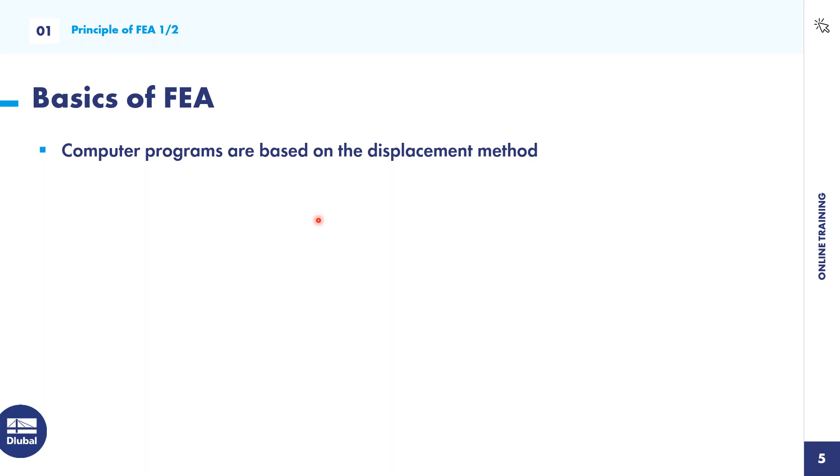But computer programs use the displacement method because it's easier to implement, more convenient, and easier calculation for the programs.

So if you look at any complex structures, it is normal that the analytical solution is not so easy. It's hardly possible to calculate or to find any analytical solution.

This is also the reason why real structures are decomposed into a mesh of finite interconnected elements. At each element continuum and at each node, the properties, especially the degrees of freedom like deformation or restraints, are described at the nodes - the properties of the element continuum.

Normally the finite element analysis is just a numerical approximation of an exact solution, so the mechanical behavior is described by approximation sets. The whole process of decomposition of a structure into finite elements is called discretization. Remember that, this is very important: discretization is the decomposition of structure into finite elements.

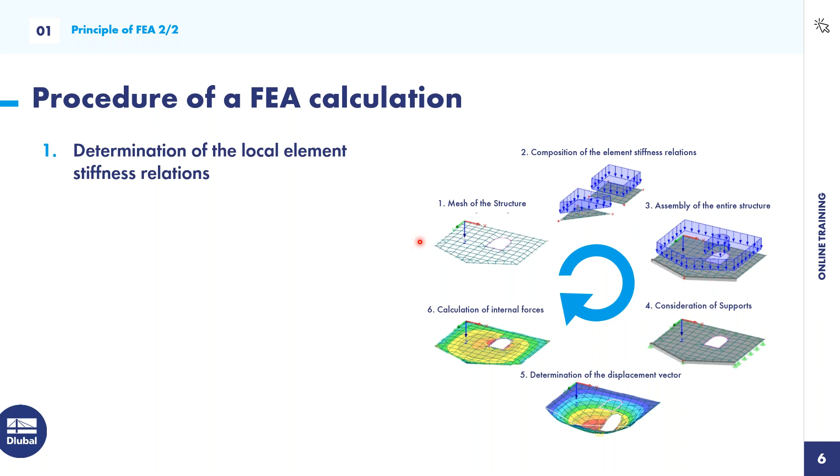So what is the general procedure of an FEA calculation? On the right side you can see this image with the basic steps. First of all, what we gonna do is the discretization, so we determine the local stiffness relations, the local element stiffness matrix at each node. So we mesh the structure, we do the discretization. Then we transform it to the global coordinate system and assembly the whole entire structure.

Then we also have to consider different supports in order that the structure is stable. So the boundary conditions are very important to define, and normally the boundary conditions are the support conditions.

And then, as we said before, the displacement method is the method implemented in computer programs. So first we determine the displacement vector, and after that the internal forces like bending moment, shear forces, normal forces, tensions, stresses, strains, and so on.

This is also called the solution of the equation system, and then we do the determination of support forces and internal forces. So this is the general and very short concept of FEA calculation.

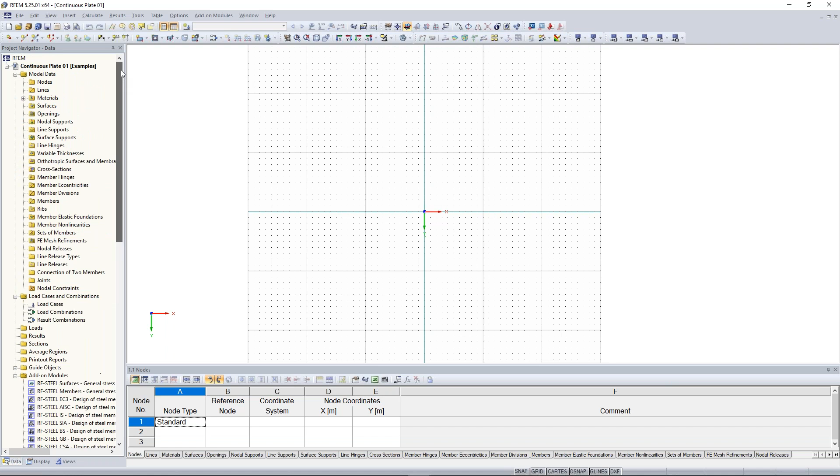Good. So I will explain now the whole user interface of RFEM. You don't have to do it now with me, because I will open another project where I can explain the whole user interface using an already existing project. Just watch and maybe note some information.

So I will open this one. Fine, very good. I will activate here in the status bar the snap and grid function.

Chronologically, the first step is that we have here the menu bar, and in the menu bar we have the possibility to do almost every kind of workflow function of RFEM. In the basic file menu, you can save, open, import, export, insert blocks, save in the project manager, print, and so on. I think this is known from other software applications.

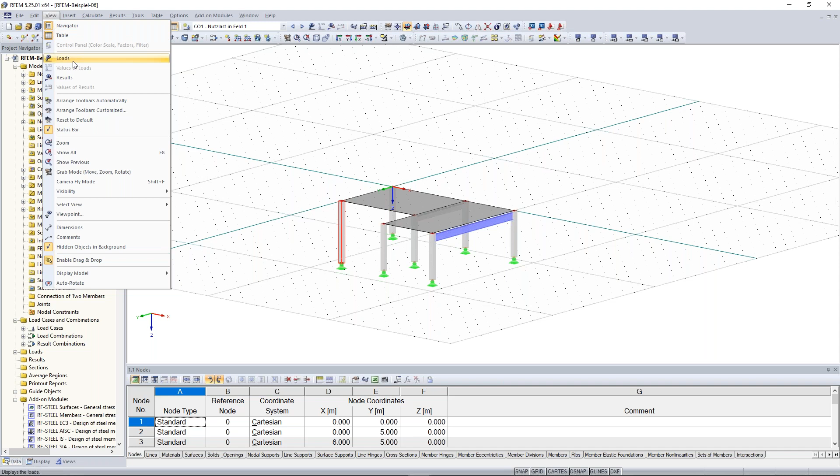Also, you find here additional information concerning the model data, loads, load cases, and combinations. In the view, you can click on loads, then the loads will appear, or click on results, and because we don't have any results at the moment, the program asks if I want to have the results, and I click yes. Now I see also the results, and some other things like comments, dimensions, and so on.

So with this insert tab, you can insert almost every object from model data to loads and also to load cases and combinations.

The general step in RFEM is that at first you model all kind of necessary objects. So you define materials, cross sections, and then you can also model members, hinges, and finally also nodal supports, for example.

Then you create also your load cases and combinations, then your loads, and then you can calculate it, and then you have the possibility to watch the internal forces and the results. And this is the basic step in RFEM, calculating projects or doing some structural analysis projects and so on. And the other bars here enable you also other kinds of projects or functions.

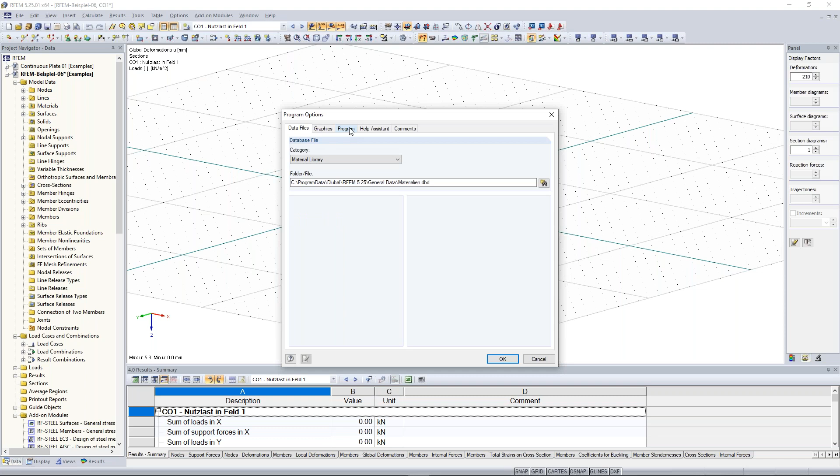Maybe this one is very interesting: the options in the menu bar, when you want to change the language. So especially for those who are maybe from Italy or from France, Spain, or something like that, we have the possibility to change here the language into, I think, 10 or 11 languages. The whole interface will change after you quit and restart the program. So Italian, Polish, French, these kind of languages we offer.

And maybe you see also in the background, I use here a white background. For those who open RFEM for the first time, you can change your background. Also here in the options in the configuration manager, you can change the background to black or to white. At the moment I use the white background, but when I double click on black background, it will change to the black background.

You can also adjust here a green or a red background. Just use here the display properties or the other kinds of colors, and you can adapt your background. Good. I think this is everything to the menu bar.

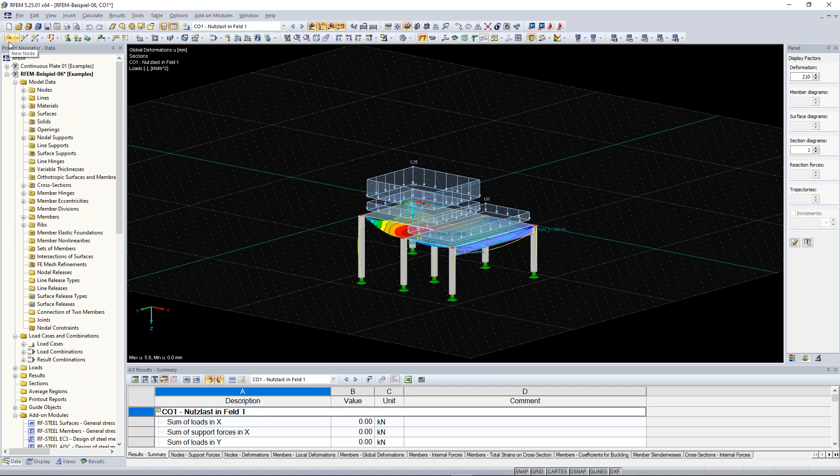Under the menu bar we find the symbol bar. The symbols enable you a fast way of inserting some objects or some views or edits or something like that. So if I want to create here, for example, a new node, I click here on new node and I click here somewhere and I get new nodes and so on.

The same also with lines, for example. I click here and then here. So this is, I think, pretty clear. Now I will undo it. And I will also change my background again to a white background. Good.

Now on the left side, you also find the project navigator. It is divided into 4 registers: data navigator, display navigator, view navigator, and also the results navigator. So in the first one, the data navigator, you find all kind of objects, beginning from model data, continuing to the load cases, the loads, results, and so on. You can create new objects there, for example, by right-click on one node, edit node or new node. But of course, you can find all existing objects.

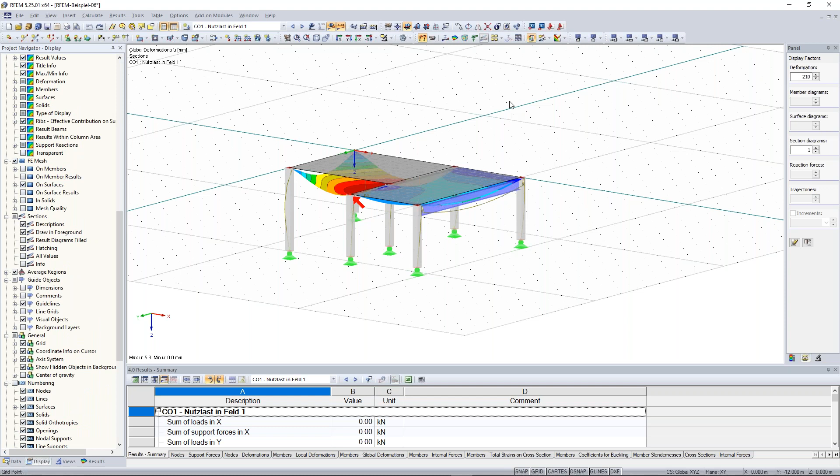You can also make some kinds of model objects disappear, like for example the nodal supports. Just click here on nodal supports, and the supports disappear, but only in the visibility. And the same here also with the results, FE mesh. So when I don't want to see the FE mesh at the moment, click on that and you don't see it.

Good. So far to the display navigator. Let's continue with the view navigator. Sorry for my bad spelling. So if you like a kind of view, for example, this one, quite nice, then you can create a user-defined view. Just click here on create new user-defined view, favorite.

Okay, and when you rotate it a little bit, or you move a little bit away from the model and you want to have your favorite view again, just click here on favorite and it jumps back to your favorite view. This is a very big advantage, especially when you are doing more detailed or more complex structures or projects. Then you can use these user-defined views.

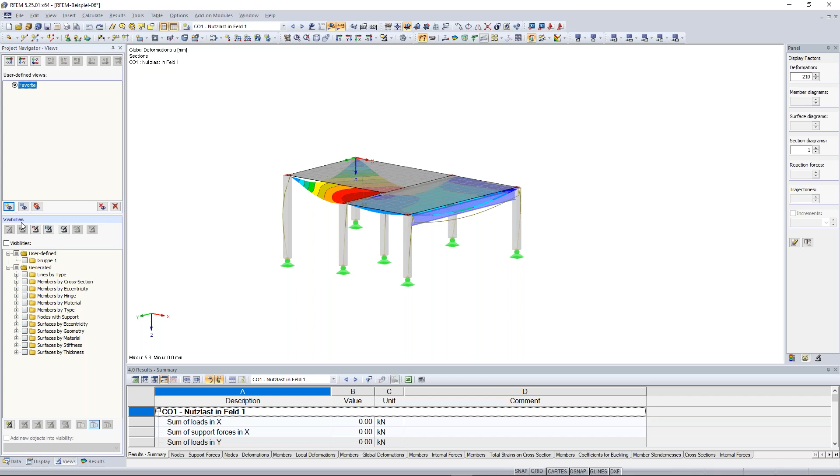Good. And also with the help of visibilities, you can filter some things better. For example, I just want to see all cross sections here of this concrete. No problem. Go to members by cross section, open this tree, and activate the rectangle 300 by 300. And only these kinds of cross sections are visible and are also possible to modify.

You can also click with the right mouse button, and this menu appears, and then you can click here on display model, sorry, show hidden objects in the background, so the surfaces here will disappear and it will look like that. Good.

Undoing this visibility mode, you can click here, visibility by selected objects, and click here on the arrow, and then cancel visibility mode. The same thing you can also do here. Good.

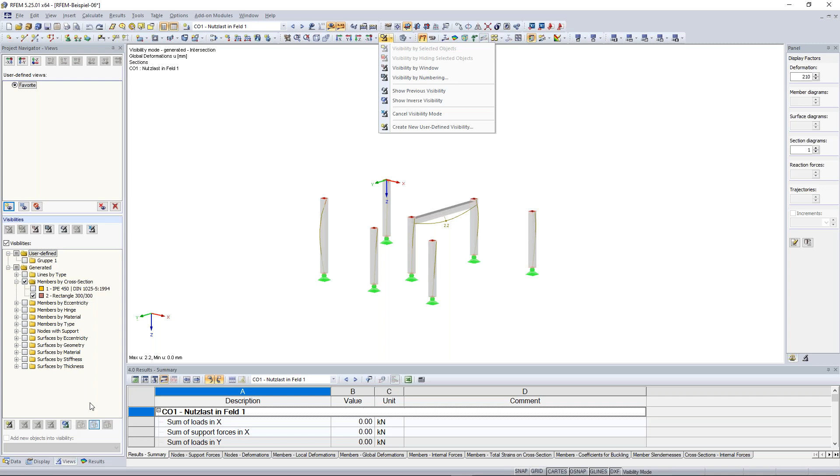And now the last navigator, this is the result navigator. Here I can see the results like deformations, stresses, internal forces of members, and also the support reactions. At the moment, I see the global deformation of the whole structure, from the members and from the surfaces.

If I just want to take a look at the members, I click here on members and choose the right internal force. In this case, I choose the normal force, and there I can see the compression forces in the concrete columns. Fine. Also here surfaces, internal forces of the surface, mx, my, and so on.

Good. And also the support reactions with the components px, py, pz, and so on. Good. So much to the navigator.

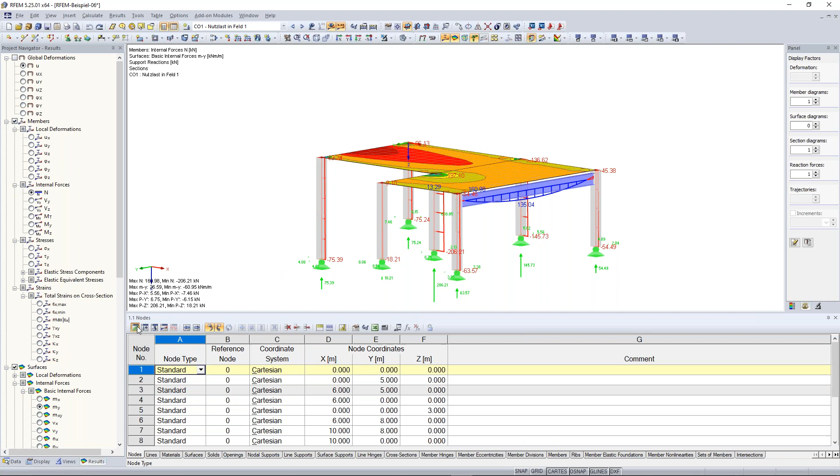Now, on the bottom of our user interface, we also have the tables. With the tables, we have the possibility to view all information and also to insert and create new information or objects. For example, I can create here a new node. So I click here on standard.

Reference node is my node here, and I enter a coordinate. I click here on 14, y is 0, and z is 3. And I see here this created node. And this is also possible for almost all other kinds of objects like lines, materials, surfaces, solids, and so on.

You can jump to the next tables here by clicking the next icons. Now I am at the load cases, nodal loads, or also member loads, line loads, surface loads, results, and so on.

Good. Now maybe to the movement of the RFEM model. With the middle mouse wheel, you can move your whole project. By clicking the left mouse button, you can create a selection window. And when you draw it from the left corner to the right corner, you select everything which is completely inside this selection window. So in this case, it would be the whole right column with the nodal support and also the node on the top.

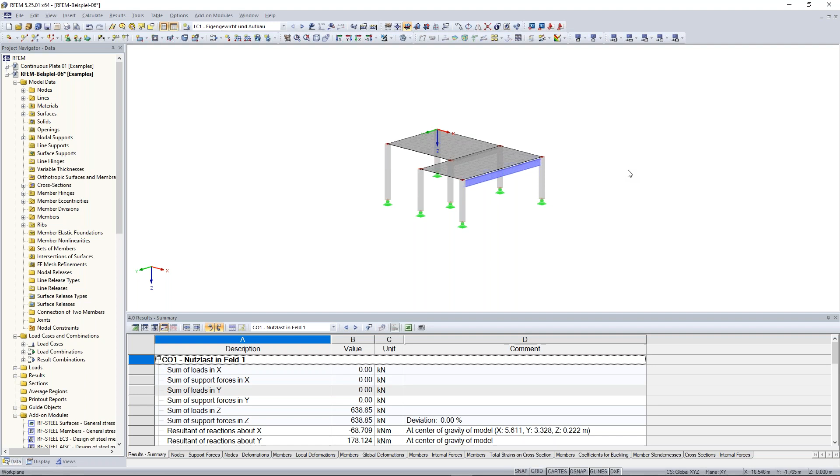And with the mouse wheel, you can also zoom in and zoom out. I think this is clear. And when you press the control key on your keyboard and also press your mouse wheel, then you can rotate the structure. And when you press the shift key and also the mouse wheel, then you can zoom in, zoom out.

We also offer these possibilities with this icon here in the icon bar. Move, zoom, rotate, and so on. There you have the same possibilities. Good. I think this was everything.

Bastian, have I forgotten something or do you want to add something? I think you haven't forgotten anything, and there are also no questions. So I think you can move on.

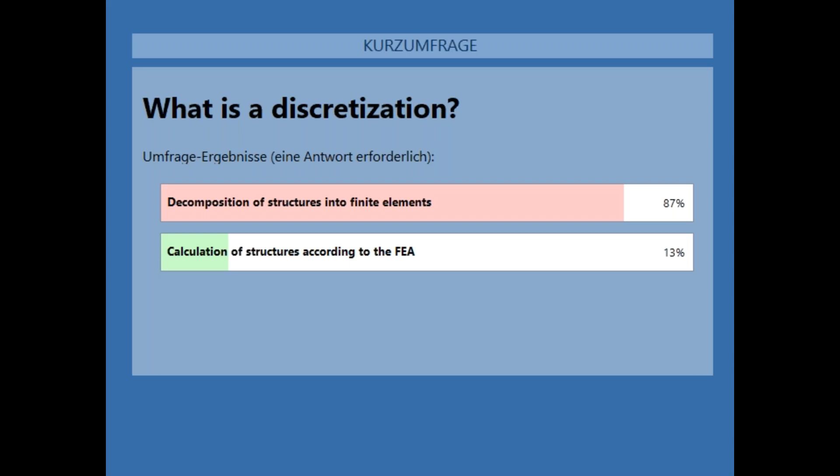Good. Most of you have already answered this question. And most of you paid attention to that chapter concerning the general basics of FEA. So discretization, what is that? It's a decomposition of structures into finite elements. Very, very good. So let's start our example.

Jump back to continuous plate. Let's start modeling it. So first of all, I create a new surface. In the symbol bar, I find this icon, new rectangular surface. And by clicking on the arrow, I find also other kinds of surfaces. But for me, it's good to use this rectangle one. I click on that. A new window opens.

And the next thing I'm gonna do is create the material. In this case, I use the Eurocode concrete C30/37 material. For those who don't have this material here, no problem. Edit the material by clicking this icon here and open the material library.

And there I have the possibility to filter different kinds of materials like concrete, metal, timber, and so on. And also the material category itself, like concrete and lightweight concrete, and also define it according to the standard. In this case, I choose the Eurocode, because in Germany we use the Eurocode. Maybe when we have some people from Switzerland, China, Great Britain, Canada, and so on, there are also some other standards.

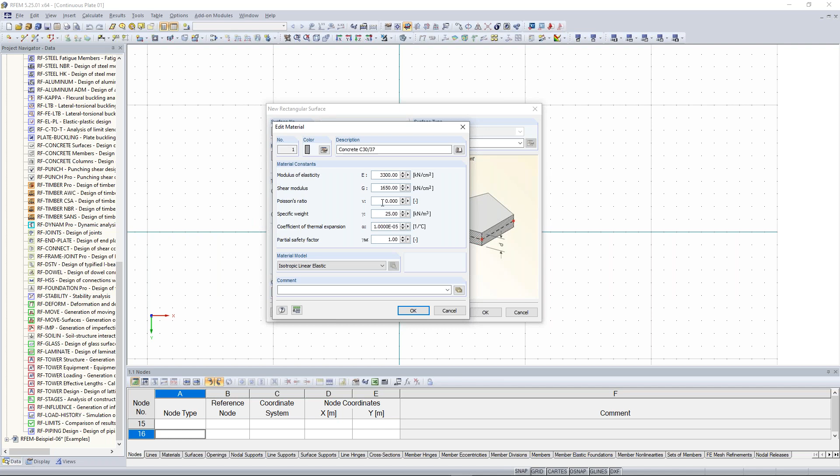I click on OK. Important note is that we set the Poisson's ratio to 0 because we want to get for that example results which should be constant over the whole plate thickness. So no shear deformation in the plate thickness. I click on OK. And the thickness of our concrete surface is 300 millimeters. So I click on OK.

And now I activate the snap function. Now I draw this rectangle from my global coordinate system, 10 meters to the right side and 5 meters high. Good. Now right click and I close this insertion of a new surface. So now I see the rectangular surface. And now I can copy it or I create a new one.

Now one tip, please remember this, it helps me a lot. By clicking the enter or return key on your keyboard, you do the same task again. So our task was the creation of this new rectangular surface. When I click the return key or the enter key, it will open this new rectangular surface window again. And I click on OK again, and I create the same surface again with the same geometry.

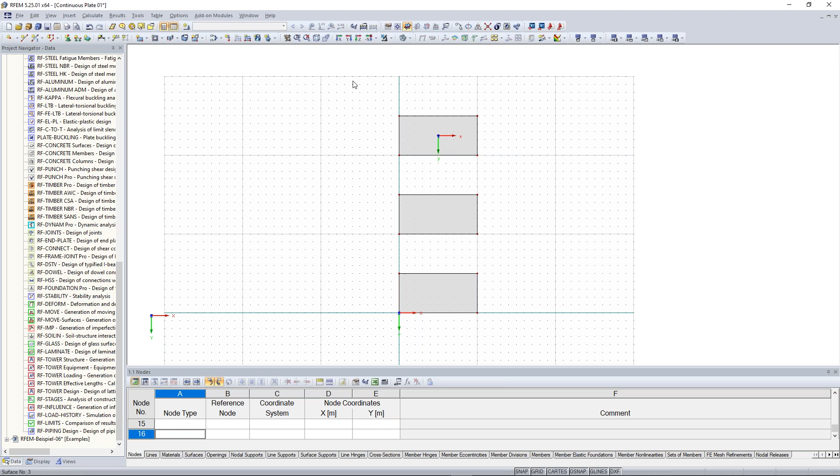And now I do it here again in a distance of 5 meters from the right upper corner node. So now we move this 10 meters downwards. So I select all 3 plates, snap near the left bottom corner of this middle surface, and move this to my global coordinate system.

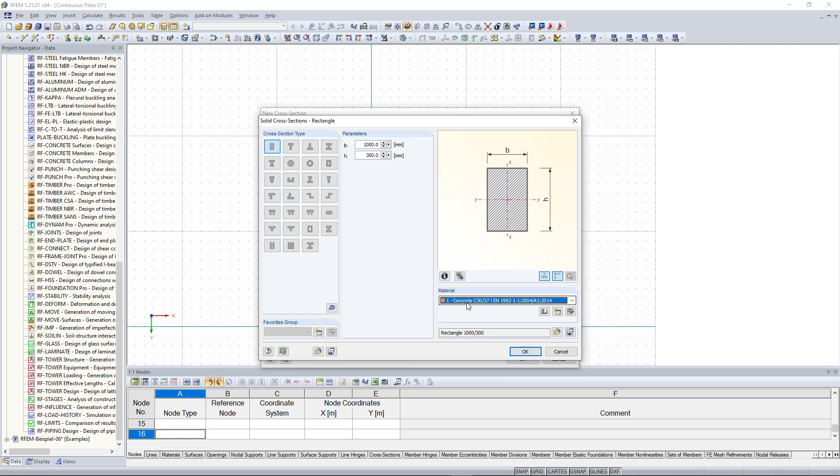To compare the results better, it is useful to use the same thickness of the plate and also refer it to a 1 meter beam. So we create a new cross-section for member start. And I click import parametric solid cross-section, a rectangle. The width of my cross-section is 1000 millimeters, and the height is the same as the thickness of my plate, 300 millimeters. The material is the same, concrete C30/37. I click on OK, and it looks like that.

Here I get the cross-section description, also with the cross-section properties, like the moments of inertia, bending, torsion, and so on. I click on OK. And now the member start has this cross-section, and the member end also has the same as the member start. I click on OK. And now I draw it from left to the right, also 10 meters long, and close it with the right click.

Good. Now I can rotate it a little bit. And now I can see it from a 3D perspective.

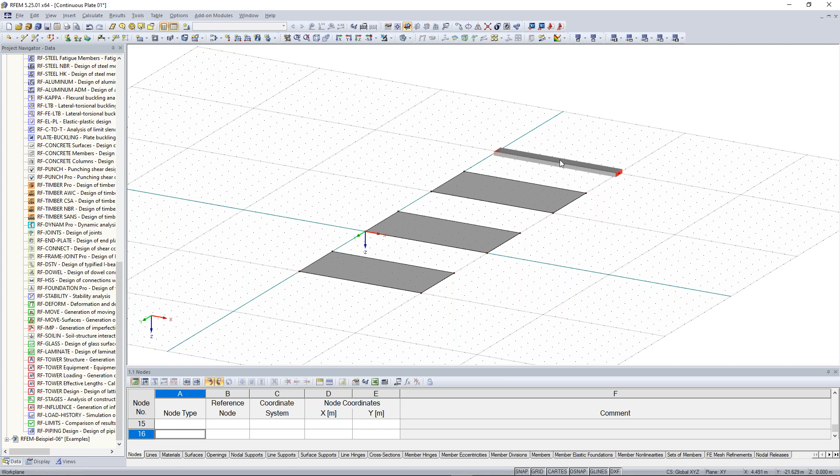Good. So the next thing is we want to have a continuous beam and also a continuous plate. Therefore, I have to create lines in the middle and also nodes here in order to create supports afterwards. So how can we do that? We can divide this line into 2 lines, and then we get the middle node. And then with the reference of the middle node, we can create the next line perpendicular to the other end.

So you can also see here the line, the red line, and also the arrow. The arrow points from the left to the right side, and this tells me that the starting node is on the left side and the end node on the right side. With a right click on one of the line nodes, I can also show the local axis system, and this is similar to the line direction.

So the local x-axis of every line or every member is the same as the line direction. Yeah, so you see it points to the right, in the same direction. And one important note is also that every member includes a line, but not every line includes a member.

So in this case, for example, I have this member, and it includes this line. Yes. So here I have this member and also the line, but not every line has a member. I think this is clear because in this case I have this surface, and these lines are just the boundary lines for this surface. Good. Let's close this local axis system.

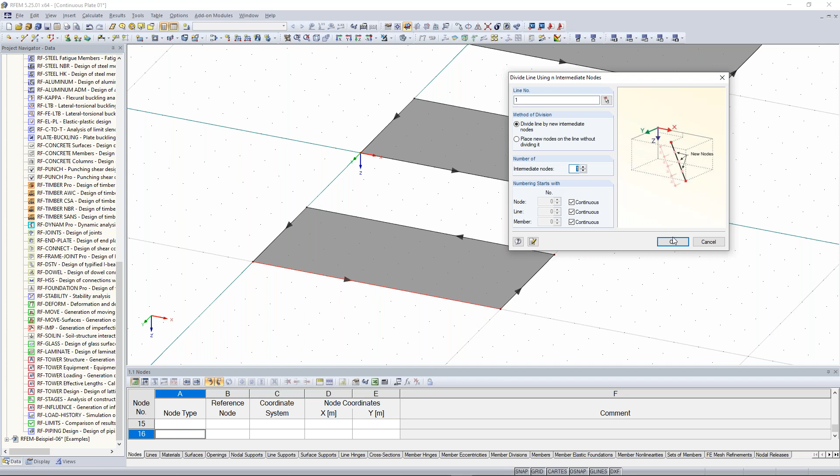Now I want to divide this line. I right click on the polyline, and I click on divide line. I just want to have a middle node, so I can divide it into n intermediate nodes. When I enter 1, it will be divided into 2 parts. When I enter 2, into 3 parts, 3 into 4 parts, and so on. So I click on 1, and I see this node, and the line is divided into 2 lines.

So the next thing is that we create this line perpendicular to the next one. So click on new line and draw this line from there to there, and double right click and we can close this.

Now it comes to my favorite way of creating objects. Yeah, and this is copying via drag and drop. We can easily copy this line by drag and drop. Just click on that line, press the Control key on your keyboard, and now with the left mouse click and hold and put it on the other surface. And we do the same thing for the other one.

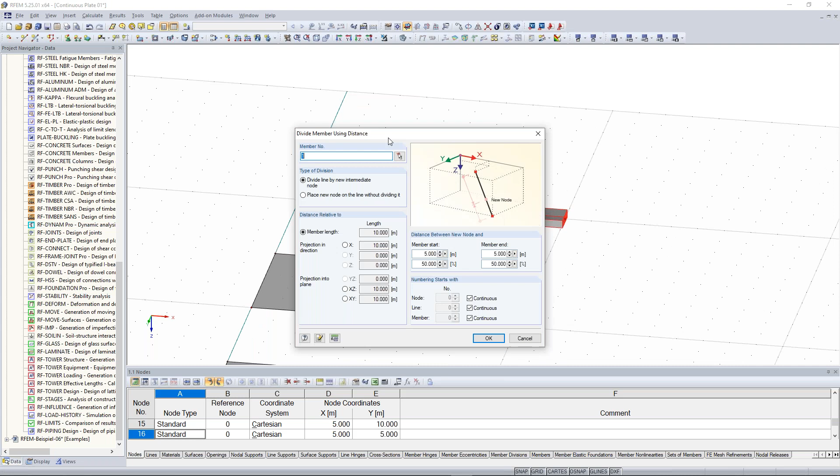Good. Now let's divide this member here. Right click, divide member. Now you can do it by distance or graphically. I decide to do it by distance. And now it's also interesting how we can do that. We want to divide it exactly in the middle. So we can choose 50% as relation or the absolute value. And it will start from the member start or from the member end.

And now here you can see the arrow, and this arrow points from the left to the right side. When I want a division 3 meters from the start, I have to enter 3 meters, and the member end will be calculated automatically. The same thing with the member end. If I want to go from the right side, from the member end, enter 6 meters, and the member start will result automatically. But in our case, 50%, because we want to divide it exactly in the middle. I click OK, and we get this new node.

Okay, Bastian, are there any questions? I see some questions in the chat. So should we show something again? What do you think? I think you can show us again how you can edit the cross section, for example, of the beam. I guess that would be nice to see again.

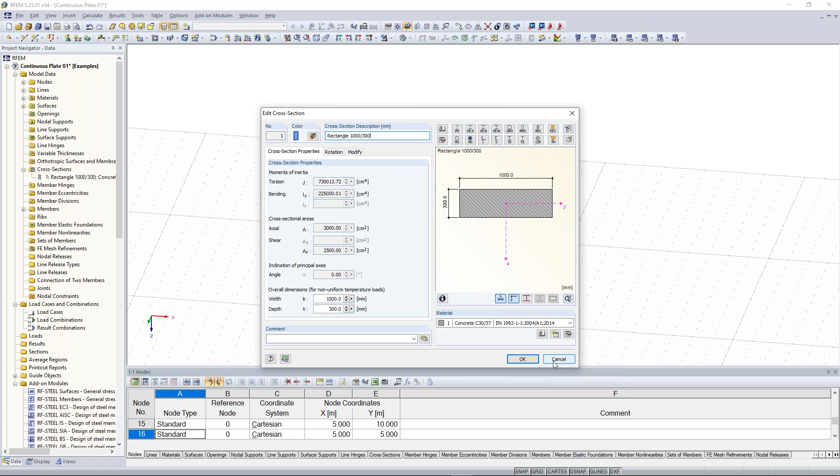Just click here on any other cross sections, like for example, IPE profile, and choose one of the IPE profiles, and then click on OK, and you will have here a new cross section. Yeah, this is one way of doing this.

Or you choose here the whole member by selecting this. Right click, member, and edit. And then you can modify your member here also by editing the cross section for the member start or create a new one. It's the same procedure like here with the data navigator. Okay. Good. I would continue.

Now let's do here some supports. It's very easy. We have here line supports for surfaces and lines, and also nodal supports like here for this kind of members. So we create now line supports. We choose here this hinged support. I click on OK. Now I draw, and this is now the big advantage of RFEM.

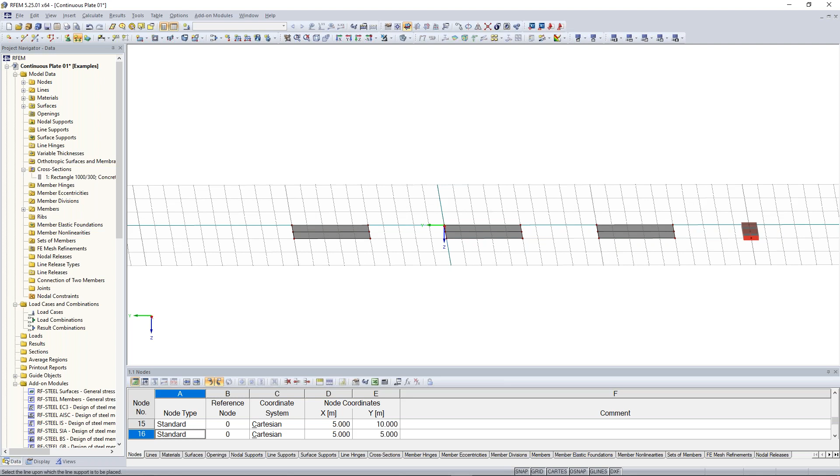I can choose and select several objects at once. So I rotate my interface a little bit, and now I draw a selection window from the right to the left side in order to get all three middle lines here. And the same thing I do also with the other surfaces.

Good. Now let's come to the member. Here we do two different kinds of nodal supports. The first one is a new type of nodal support. So therefore I click here on new type of nodal support. And now let's watch here this definition of support conditions.

So if I activate or check one condition, like here uZ, then I restrain the deformation of uZ. So no deformation in this direction is possible. So therefore there will be some forces. And the same also with restraints, for twisting and also for moments.

So in order to prevent the torsion or the twisting of my member, I also have to activate the restraint phi x. So this will prevent a torsion around the x-axis. Good. Now click on OK.

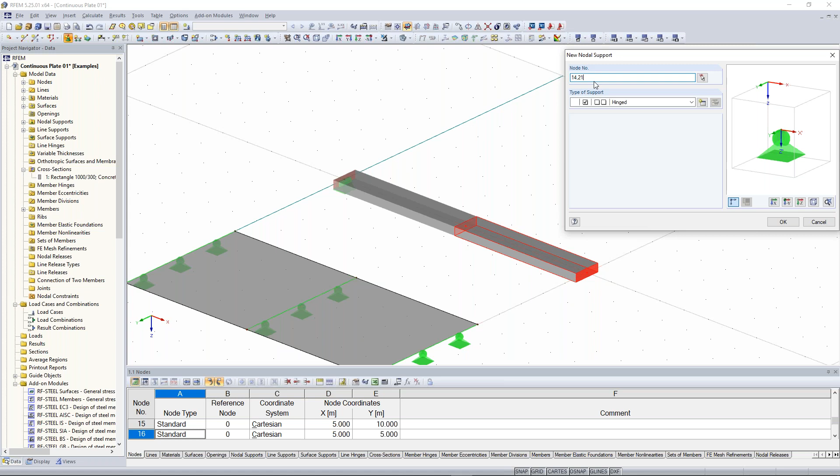And because we have already selected the nodes here, the nodes appear here also in this box. Click on OK, and the two supports were created. Okay, good.

Now, the next step is the creation of loads. Before we add some loads, we have to create load cases. So click here on New Load Case in the symbol bar. You can also do it here: Load cases, combinations, new load case. Same procedure. As you can see, we have more possibilities to insert or create something. So new load case.

And for our simple example, we insert the description test load and deactivate the self-weight, in order to compare the results better. So then I click on OK. And I will create here surface loads and here member loads. So again, new surface load here in the symbol bar.

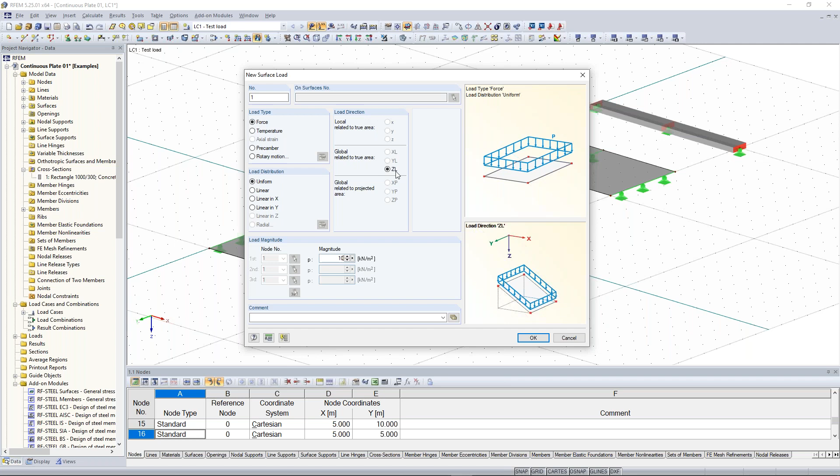Here I can set up load types, load direction, the load distribution: uniform, linear in X, linear in Y, and so on. I add here the magnitude of 10 kilonewton per square meter. The load direction is greyed out here, because we use the model type 2D, so there we have some restrictions concerning the load direction. I click on OK.

And I add here the loads on the surfaces. Good. And now let's do the same for the continuous member. One big mistake, especially for RFEM beginners, is to use line loads for members. But we have to use member loads for members. Line loads are used for additional loads on lines.

So when I have here a railing or a handrail on this line, and I want to add some loads, then I can use the line load. Or when I want to consider wind loads at lines, then I can use line loads. But when I really want to load members, I have to use the member load.

Please keep that in mind, that for members I use member loads. So I click here on member loads, enter the same load parameter, so 10 kilonewton per meter. Click on OK, and I choose here both members.

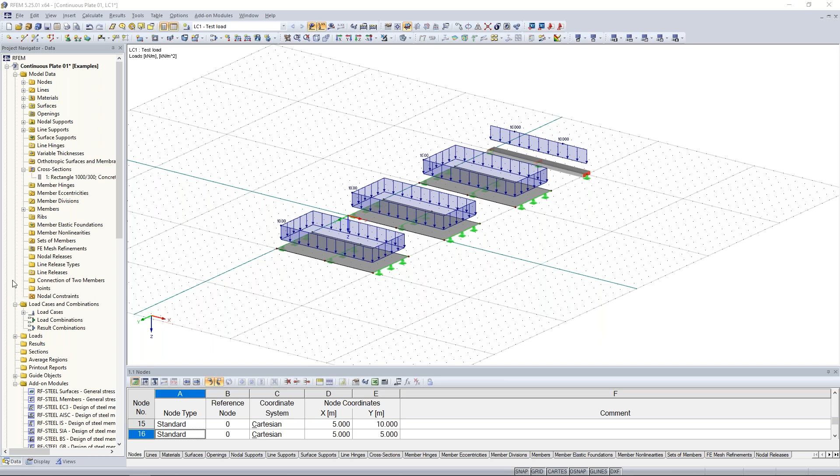So the next part is the creation of the refinement, so every surface gets a different mesh size. In order to do that, I create here FE mesh refinements. Normally, the whole settings of the FE meshes are managed here at the Calculate tab under FE mesh settings. Here you set the general target length of the finite elements. So if I would do nothing, every surface would get a finite element length of 0.5 meter. But in this case, I want to have for every surface another one.

So I do here FE mesh refinement, right click, new FE mesh refinement. I choose here at first surface, target FE length 1 meter, so we get 1 meter big meshes. And now I have to choose the surface, and in this case, I choose the first surface. I click on OK, and click on OK again.

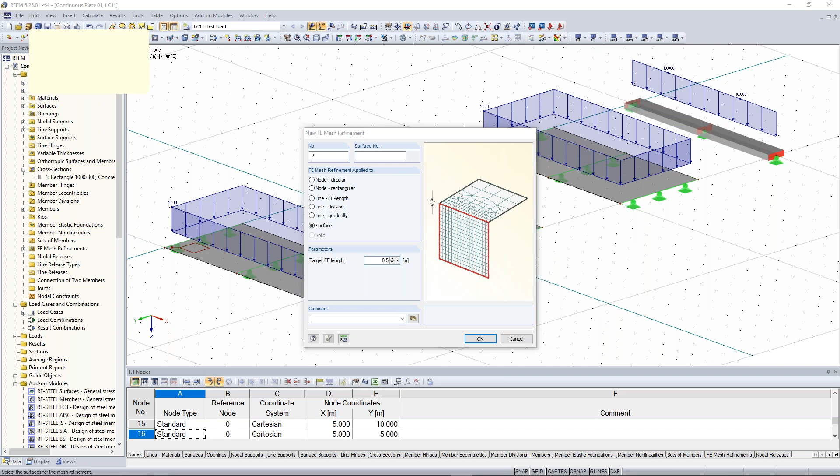Now, let's do the same thing again. Right click here in the data navigator, new FE mesh refinement, 0.5 here at the target FE length, and the surface is this one. I click on OK, OK again.

And now here we do a different way of insert. Right click, FE mesh refinement, new. Because we have already selected it, it shows me here that we have this third surface. We create a new FE mesh refinement 0.1.

Here we see the FE mesh refinement with this quadratic object symbol.

Yeah, and now I would suppose that we calculate it. And before we do it, in order to compare the results better to each other, it would be quite helpful if we have sections here at the surfaces. In order to do that, here in the data navigator, we have also the possibility to create sections.

Just right click, new section. The section name is 1-1 or something like that. You can also do A, or whatever, it's up to you. The sectional surface, so the projection direction is here, the global z-axis. I think local and plus z is okay, but please only on surface 1.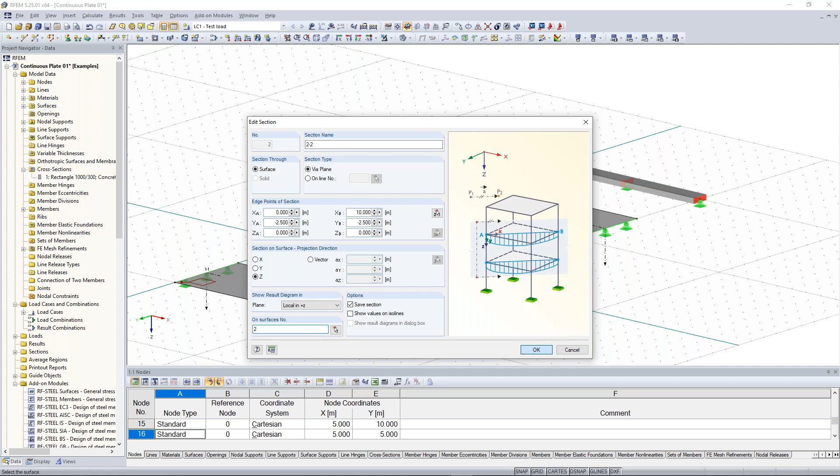So, modify or edit here the section name and choose here the correct surface. And let's do here this thing again. Choose here also the correct surface and click on OK.

Good. Now I think we have everything we need for our calculation. The next thing is starting the calculation.

Therefore, you can use here calculate all in the symbol bar, or also here calculate RFEM results only, or to calculate, and there you can choose your load case or your load combinations and so on. The topic of defining load combinations and so on will be part in the next chapters, in the next parts of our student series of online training. So I click here on calculate all.

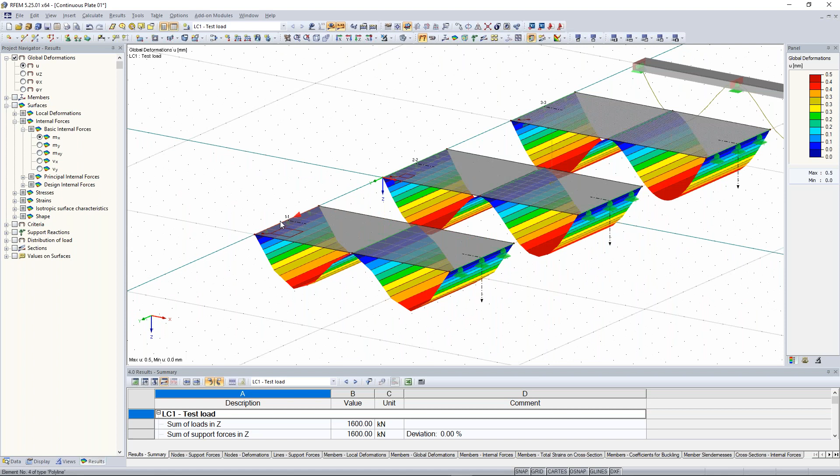And the first thing what we gonna see are the deformations. So here the deformation, and also very nice thing is when I change here the display model to the wireframe display model, I see here also the size of the FE meshes. And as we said before, here in this first surface, we have a FE mesh size of 1 meter, 0.5, and 0.1.

In order to see the results here at the beam, we have to activate members, and we see here the bending moments: field moment, support moment, also the shear forces and so on. But I think this is clear.

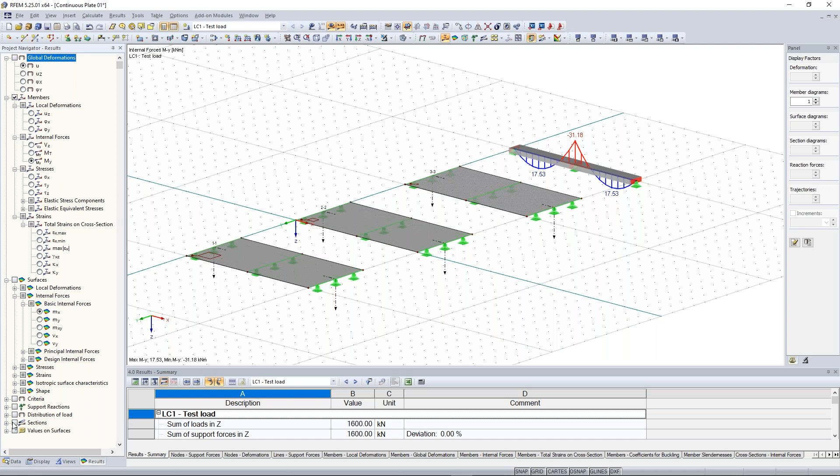More interesting are maybe the sections of the surfaces in order to see the bending moments of the surfaces. Therefore, I activate here in the result navigator sections, and I want to see the bending moments. So I have to activate here surfaces and choose here MX.

One hint to the basic internal forces of these surfaces. You can see here also the local axis of every surface. At the moment I deactivate the results just to see what I want to explain you. Here we see the local axis of this surface, the x-axis and the y-axis. The x-axis points to the global x-axis, and the local y-axis also to the global y-axis there.

Now, important point: the basic internal forces like mx and my are located in the same direction like the local axes. So mx is along the local x-axis of this surface, and the same for my. The opposite is true for the member, because here we have my, and when we take a look at the local axis of the member, the bending moment is around the local y-axis. At the surfaces it's along the local x-axis when I watch the mx bending moments. So keep that in mind: surfaces along, and members around the local axis. This is important to know.

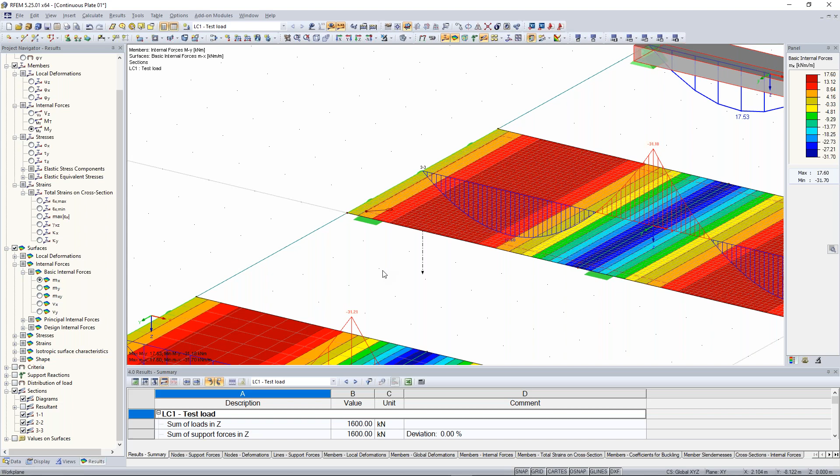But now this will be very important: the length of this FE mesh. Here you see it's linear, and normally it's everywhere linear, but here we have in 1 meter just one FE element, and here we have 10 FE elements in 1 meter. So the approximation of the results will be here very incorrect, I would say, or not really exact, and here it's more exact. You see it at the distribution of the moment section, and it isn't really exact in comparison to that one where we have really fine FE mesh sizes.

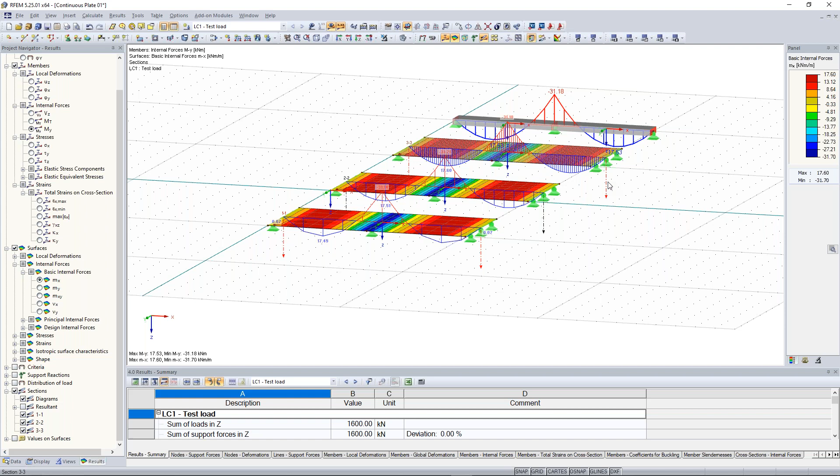So you have to know it. I would suggest you make that FE mesh quite fine, but not too fine, because when you have too fine FE meshes, the calculation will take very long. So you have to find the right proportion, the right FE mesh sizes, in order to have correct and exact values, but also consider the long calculation time of FE programs.

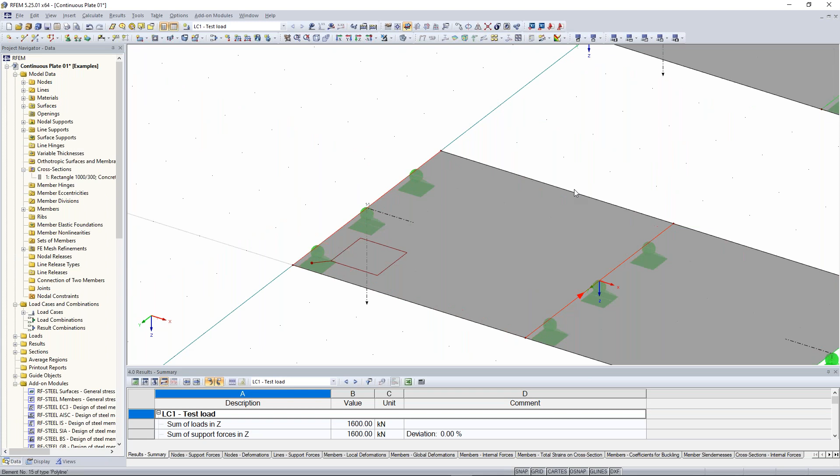Now I see one question, and this question is: what is the suggested FE mesh size? I would recommend you have at least 4 up to 6 or 8 FE meshes in one surface. So we have here from there to there, it's 5 meters. So at least there should be, from one boundary condition to the other boundary condition, at least 5 up to 6 meshes, finite elements. So I would say this one is quite good.

This one with the mesh size 0.1 meters is very fine, and it is not so important to have such a fine FE mesh.

And another question I see: are there any shortcuts for show or hide loads? No, unfortunately not, there are no shortcuts for that kind of things. But maybe Bastian, you could find other shortcuts for other types of functions. This would be good if you could post it as an answer for that question. Okay.

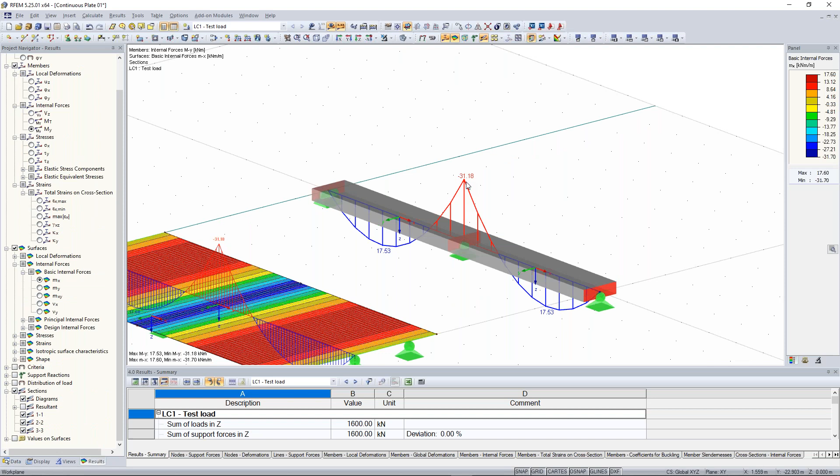Normally in your studies you do hand calculations, which is pretty common, using tables or calculators. When you calculate the support moment of a two-field beam or continuous beam, you may get different values. Let's watch the results again. Normally you would get a support moment of 31.25 kilonewton meters, yeah, but in this case just 31.18.

Why? It's due to the shear activation of members. So I go here to calculation parameters, and here you see the activation of shear stiffness of members. If I activate it, it considers additional shear forces and therefore also additional deformation, and you calculate it as not as stiff. So in Germany you would say schubweich. So with the activation of these cross-sectional areas AY and AZ, additional areas of cross-section.

And this will be very interesting for the next chapter now, because I have also prepared a PowerPoint for that. So I jump back to my PowerPoint.

Now I want to take a look at the plate theory. First of all, we try to relate it to the beam element. On one side we have the Bernoulli beam, and on the other side the Timoshenko beam. The Bernoulli beam says the cross-section remains plane, and also the cross-section remains perpendicular to the member axis. We don't consider any shear deformation, so we have really rigid shear stiffness. When you calculate something in your studies with tables, you will calculate a Bernoulli beam.

But what is mostly implemented in FEA programs is the Timoshenko beam, or also the other plate theory. But first let's take a look at the Timoshenko beam.

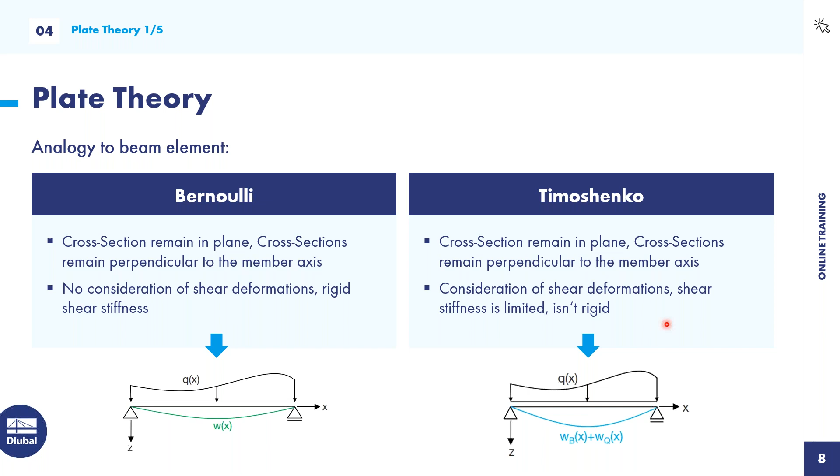The first condition is the same: the cross-section remains in plane, and also the cross-section remains perpendicular to the member axis. But what we consider here is shear deformations, so the shear stiffness is limited and not rigid anymore. Here it remains perpendicular to that axis, and here we get an additional angle, so it won't be perpendicular anymore to the member axis. So this is additional deformation in the Timoshenko theory.

Now let's transfer the beam theory to the plate theory. The Bernoulli beam is, in plate theory, the Kirchhoff theory, and the Timoshenko beam is the Reissner-Mindlin theory. So what are the conditions? We have a geometrically linear system, so small deformation, Hooke's law, cross-section remains flat, no warping, and also constant thickness. And we don't consider any shear deformations.

Reissner-Mindlin: the four conditions are the same, but we consider shear deformations and also the transverse and lateral strain. What is that last one, the transverse or lateral strain? When I have this kind of beam and I try to tie it with a force, it will get a little bit longer. That part where it gets longer is called delta L. And also the cross-section becomes a little bit smaller. This effect is called the transverse or lateral strain. In German we would say Querdehnungseffekt.

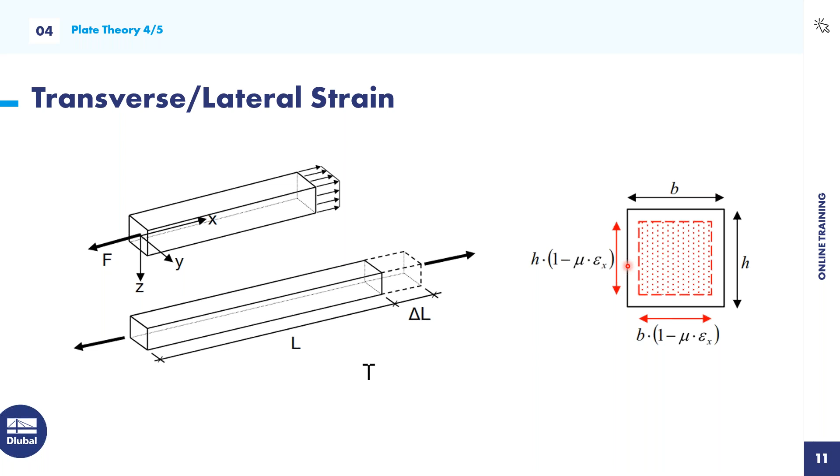So again, as a summary: Kirchhoff on the left side, Reissner-Mindlin on the right side. Kirchhoff is the same as Bernoulli, and Reisner-Mindlin the same as the Timoshenko beam. So at Kirchhoff we don't consider any kind of shear deformations, and at Reisner-Mindlin we consider shear deformations. So what can we use Kirchhoff for?

We can use Kirchhoff for the theory of thin plates, so normal concrete surfaces like in story buildings or something like that. There we can get quite good results with the Kirchhoff theory, it's a simplified approach. And the Reisner-Mindlin theory, since we consider the shear deformation, we can use it for thick plates as well as thin plates. So when you calculate according to Reisner-Mindlin, we will get, for thin and thick plates, quite good results.

Because it's a higher value approach, we get more accurate shear forces. So my recommendation for you is please use Reisner-Mindlin, because then you get quite good results for almost every kind of application area. When you use Kirchhoff for very thick plates, like plates with a thickness of 2 or 3 meters, like foundations or something like that, then the results won't be so correct.

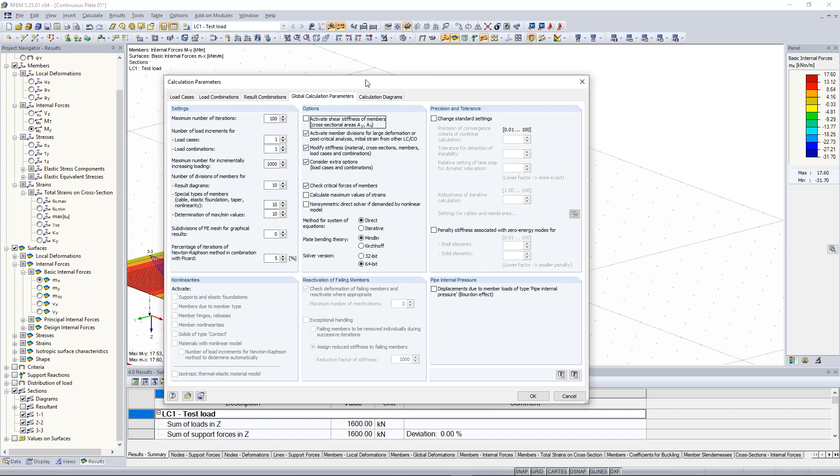Good, now let's jump back to RFEM, and let's see what happens when I change the calculation parameters: the activation of shear stiffness of members. So I deactivate it. Now I calculate according to the Bernoulli beam, so no shear deformation. I recalculate it.

And I will get the support moment of my two-field beam of 31.25. This will also be the same when I calculate it according to tables, or when I do this by the force method or by hand. So keep that in mind.

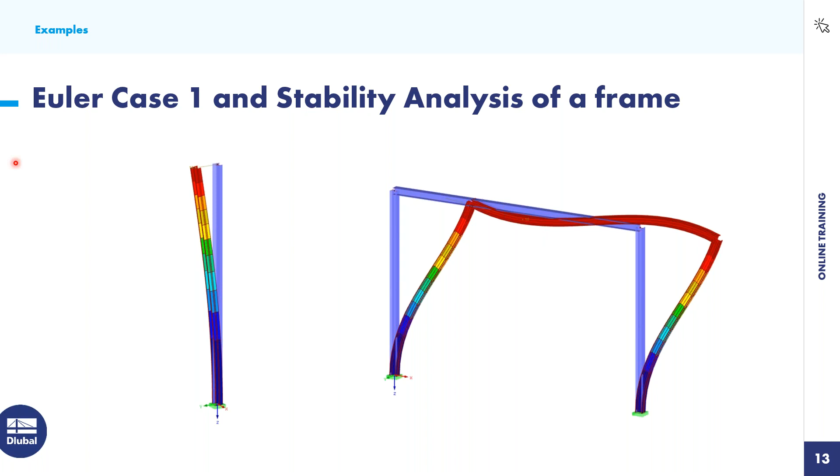Good. Now let's jump to the next chapter, and this is the Euler case 1. This is not a hinged beam, this is a clamped beam, a clamped frame. Okay, so let's go ahead. I create a new model here in RFEM.

And in this case, I insert here Euler case 01, save it under downloads, and very important now, I want to consider a 3D model, because we do a stability analysis of this Euler beam, and there I want to consider both buckling directions. So therefore 3D, I click on OK.

And what we're going to do now is create this column. Therefore, click here on New Single Member. Click on Create New Cross-Section for Member Start. And we choose here a steel profile that is very common in Germany, HEB 300. So I click here on Import Rolled Cross-Section HEB, or when you can't find it here, you can also import the cross-section from the library.

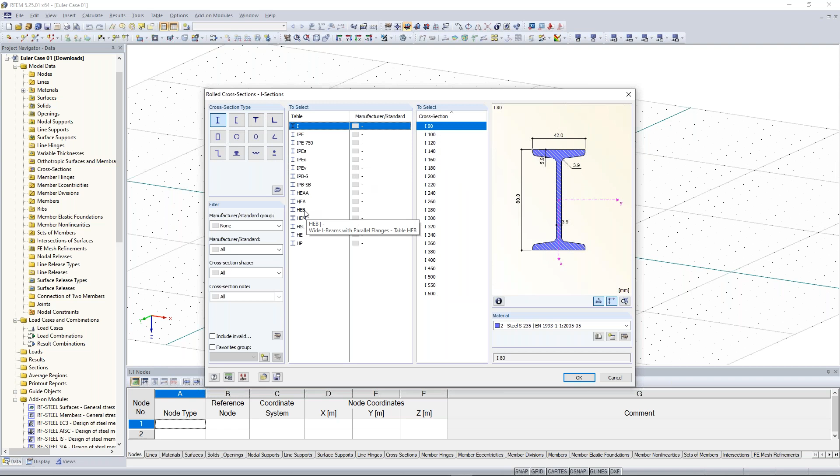Click here on I-sections and choose here this HEB. So what are HEBs? These are wide I-beams with parallel flanges. And we choose here this HEB 300. Material is steel S235. We can also edit this material. I choose here this steel material according to the Eurocode. You can also import material from the material library. Steel S235 because of its yield strength of 23.5 kilonewtons per square centimeter. I click on OK.

And now I want to create this column, and this is also maybe one of the mistakes: when I want to create a column and I'm not in the correct work plane, I can't model it in the height. It doesn't work because I am here in this work plane.

Two possibilities. I change the work plane, for example to XZ, and then I draw it 10 meters high. Or if I want to stay in the same work plane as before, XY, I also have the possibility to create this beam with the help of length and direction. And now I say, okay, perpendicular to the work plane, 10 meters high, in the opposite of the global Z direction, and I have the same result as the left beam. Okay.

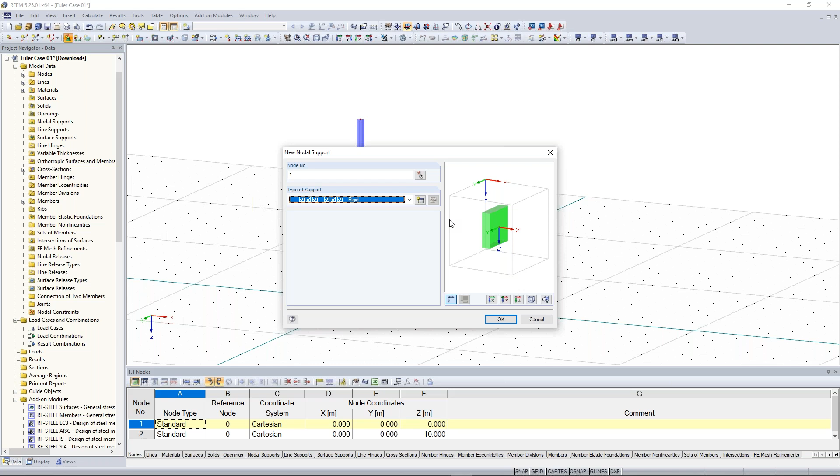This is one tip. I delete the right column, and now I will add here this nodal support. In this case, we have a rigid support, so the whole node is fixed in every direction. So horizontal and vertical forces and also bending moments around all axes can be transferred into this nodal support. Good. Now, this was everything concerning the modeling.

Now we create a new load case. The load case will be test load. And we don't consider the self-weight again. And I click on OK. Now we create a new nodal force on that node here. Therefore, we click here on new nodal load. You find it here in the symbol bar, new nodal load.

And this nodal load refers to the global coordinate system. I put here a horizontal force in the global x direction of 10 kilonewtons and a vertical force of 100 kilonewtons. I click on OK and select the head node here. Good. Now let's calculate this thing. Show results or calculate all, doesn't matter.

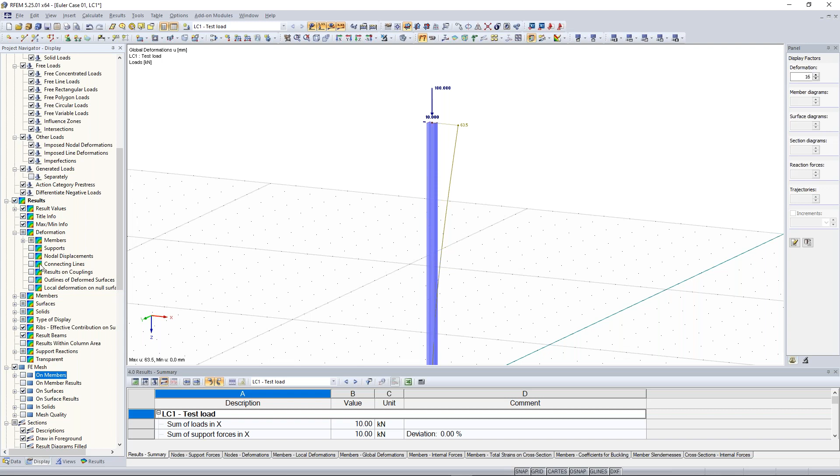And what we see now is the deformation. In this case, the deformation is shown as 63.5 millimeters. We can also show the deformation a little bit nicer. Therefore, we go to the display navigator, scroll to the chapter results, and jump to the chapter deformation, members, and I want the cross-sections to be colored. So I click here and we see the cross-section colored.

Also the deformation of the member. Okay, I think the deformation is pretty clear. We have here mainly this horizontal deformation, maybe also a little bit of compression. Okay, good.

Now, also an interesting thing is the calculation theories: the calculation according to the first order theory, then also the second order theory, P-delta. When I do the calculation of load cases according to first order, I build the equilibrium of the system at an undeformed system. The second order theory calculates the equilibrium at a deformed system.

And there can be some differences, especially when I'm talking about internal forces like the bending moment. Therefore I want to show you the differences. I will create 3 windows in order to show you the results of this column a little bit better. So I click here, new window, again on new window, and I show the windows as 3 windows. Perfect. I change the view to the opposite of the y direction.

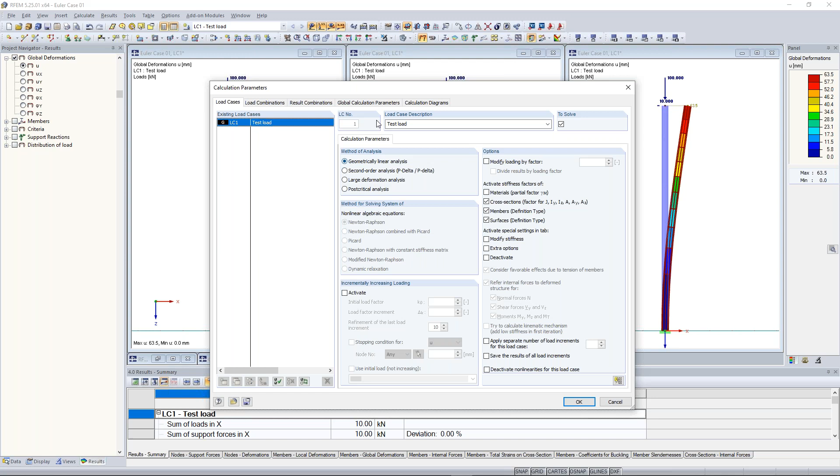So what we're going to do now is go to Calculate in the menu bar, go to the calculation parameters, and go to the register Load Cases. There we have our load case test load. Normally the load cases in RFEM are preset with the theory of first order, so a geometrically linear analysis. Now we're going to do a nonlinear geometrical analysis, so we choose the second order analysis, P-delta. I think especially the American guys know this as P-delta.

I click on second order and calculate it. Maybe you see also the deformations are a little bit different, but this is not the main point. I take a look at the bending moment, especially at the bottom. There we have 106.87 kilonewton meters. Normally, with a length of 10 meters and a horizontal force of 10 kilonewton, 10 multiplied by the lever arm of 10 meters is 100 kilonewton meters at the bottom as internal bending moment.

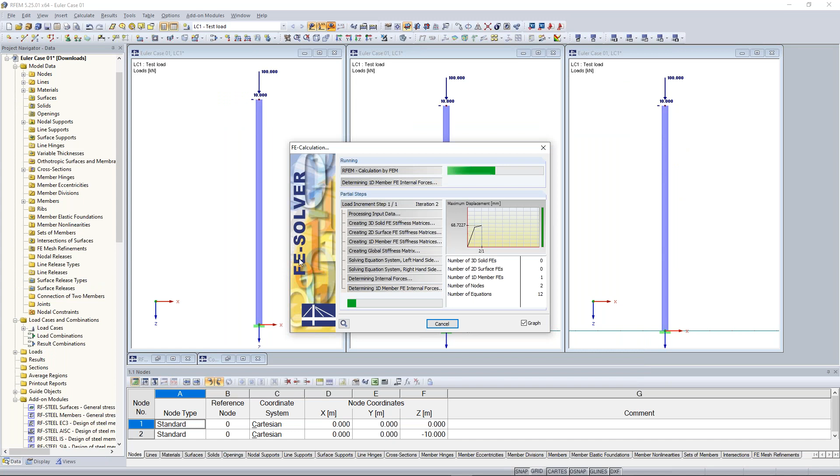So you don't have to do it again, I will show you the internal forces again for the geometrically linear analysis, so theory of first order. Here 100 kilonewton meters. Now again with theory of second order. And now we get an additional 6 kilonewton meters. Where does it come from?

As I said, the geometrically nonlinear analysis according to the theory of second order is the calculation of the equilibrium at the deformed system. Now let's take a look at the deformed system. The horizontal deformation at the head node is 68.7 millimeters. When you multiply it with the vertical force of 100 kilonewton, you get an additional bending moment of 6.87 kilonewton meters, which results in an overall bending moment of 106.87 kilonewton meters.

So 10 kilonewton multiplied by the lever arm of 10 meters is 100, plus the 100 kilonewton due to the deformed system: 100 times 68.7 millimeters equals 6.87, and as a sum we get 106.87 kilonewton meters. So much for the different calculation methods.

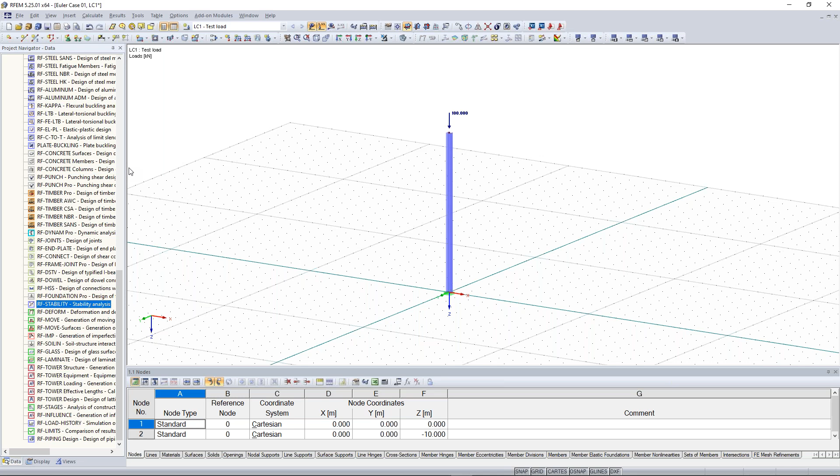You find RF-STABILITY in the Data navigator. Scroll down, here you will find it. Or you find it in the menu bar under Add-on Modules, Stability, RF-STABILITY. This new window will open. With RF-STABILITY, you can do any stability analysis by the eigenvalue method. So you can calculate eigenforms, buckling forms, and get the critical lengths, critical forces, critical loads, and so on.

This is very good in order to detect weaknesses of your structure or some critical points. Now let's do the typical Euler case number 1. In your studies, I think you have already learned what the first eigenform or buckling shape of an Euler case looks like. Let's do the same here in RF-STABILITY.

First of all, number of lowest eigenvalues. In this case, Euler case 1, only 2 cases are important, so I choose 2: buckling around the weak axis and buckling around the strong axis. We choose load case 1. We don't need to consider favorable effects due to tension, and also no prestress for cables and membranes. But I would activate the division of straight members and set the minimum number of member divisions to 10.

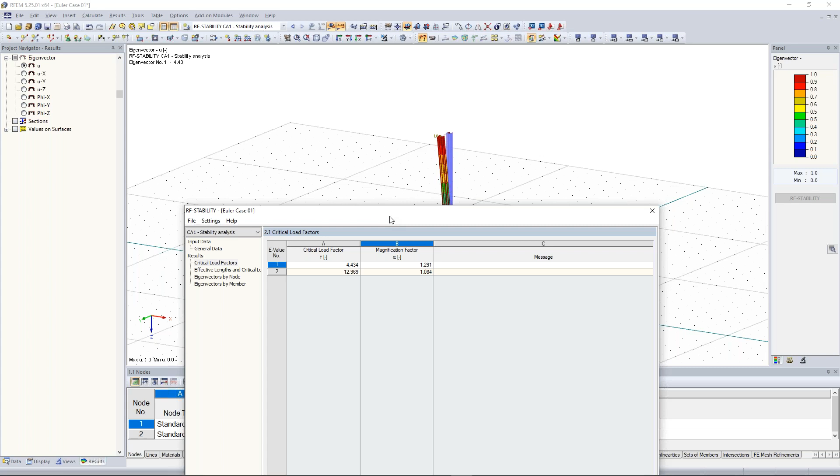So let's watch the eigenforms graphics. The first eigenform of this column is the buckling around the weak axis. You can see it here. The weak axis is the z-axis. So around the weak z-axis my system is buckling; this is the first eigenform. Now the next eigenform is around the y-axis, because the y-axis is the much stronger axis. I think this is pretty clear. And because the strong y-axis can resist more loads, the critical load factor is higher, and also the critical load is higher.

Good. Now let's see what happens when I increase the load of 100 kilonewton to 443, so still under my critical load. So 443. Let's calculate this, calculate all, because when I have also opened an add-on module, I have to click here, calculate all, in order to get results from every load case and every add-on module.

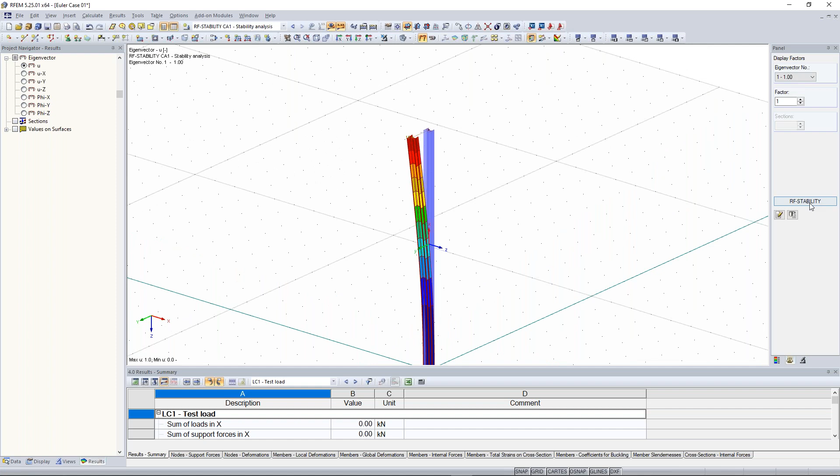Good. Okay, RF-STABILITY. Now we can see it. The critical load factor is exactly 1. So this means that the system with that load of 443 kilonewton is almost unstable. Now let's see what happens when I increase the load to more than 443, to 444.

Now we get the result and then a calculation error. The stiffness matrix is singular, the model is unstable. And this is the reason: the model is unstable because of that too high load. So in this case, my system is unstable, the stiffness matrix is singular.

For that, we have a very good FAQ. Bastian, maybe you could put the FAQ in the chat, and this FAQ will help you find the problems or the critical locations why your model is unstable, especially at the beginning of modeling with RFEM, where it's possible that you find these problems. Okay, good.

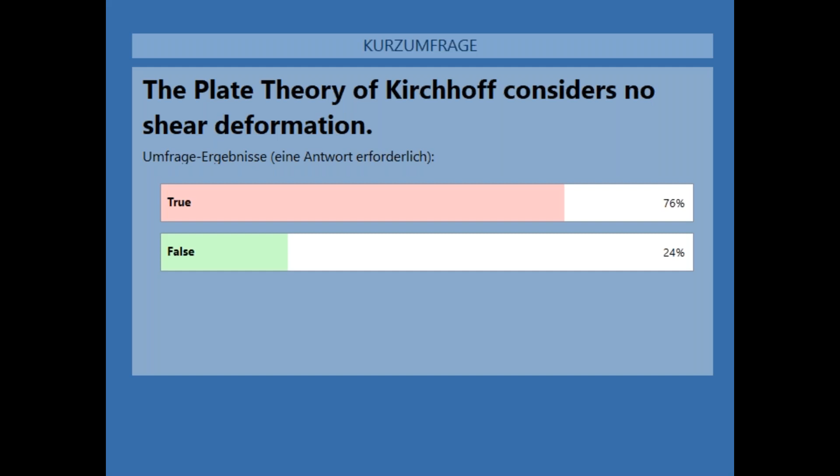So the correct answer is the first one. The plate theory of Kirchhoff considers no shear deformation. So that's correct. And now I have also prepared another question concerning the critical load factor.

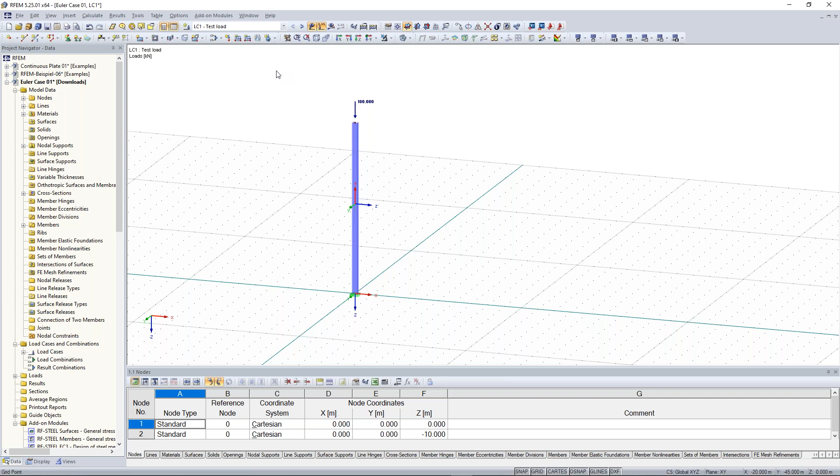Now, let's jump to the last chapter of this training, the modeling and analysis, also stability analysis of a clamped frame. Therefore, I change here the nodal force back to 100 kilonewton. And a big advantage now in RFEM is that we can easily copy something. Therefore, I select the whole column, right click, and I say move and copy.

Now, it's important when I want to copy something that I put here a number higher than 0. And the displacement vector is 10 meters. I can put here 10 meters as number, or I can also select 2 points in order to get the displacement vector. In this case, I choose here this length and this length. It's the same.

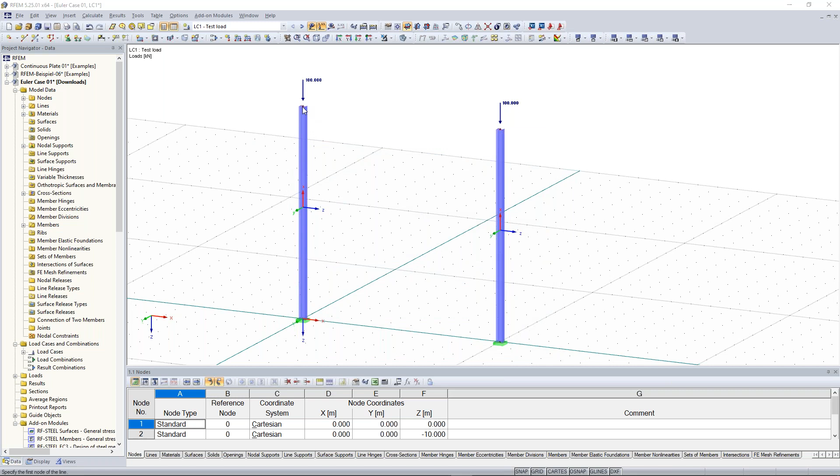Good. Now I need here a girder for the frame, and therefore I create a new cross section, in this case also a new single member. I click here in the symbol bar, new single member, and I create a new cross section for the member start. In this case, I choose the IPE 300 profile. I can also enter this in the cross section description. Material remains steel. Click on OK and draw it from the left column to the right column.

Okay, good. Now I want to change the height of this frame. Therefore, I select both nodes, right click on the member, doesn't matter, member or nodes, and then I can choose here the nodes and say, okay, I want to edit it. And because they have the same coordinates, I can modify here the z coordinate. And I choose here -6.

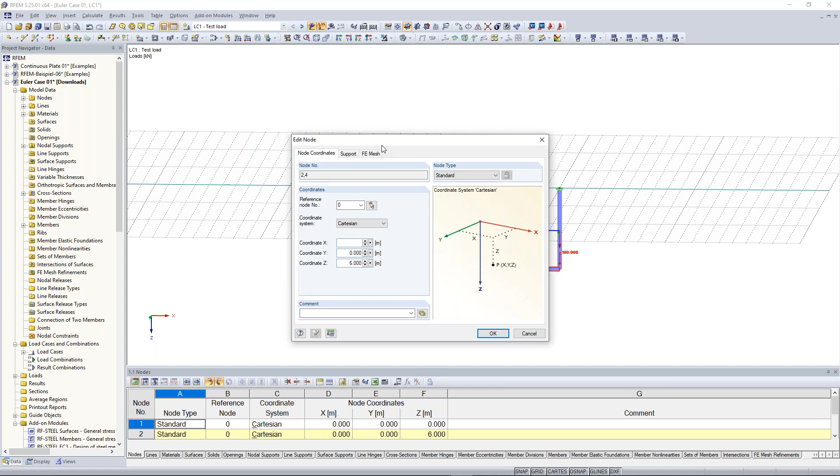So what was the mistake? I'm sorry. The mistake was that I also deleted the minus, and now the system was oriented according to the global z-axis, and my global z-axis is located downwards. Therefore, also the coordinate z plus 6 goes in this direction. But I want it like that, -6. But no problem, you can change it afterwards very easily. Good.

Now, the same thing again. Let's do the stability analysis. Therefore, click here on RF-STABILITY again. And now we show a few more eigenvalues, 6, for example. Calculate it. And now let's watch the eigenvectors. We can see that we have a deformation out of the plane. Normally this isn't so good for frame structures or for steel halls, and we try to prevent these situations. Jump to the next eigenvector.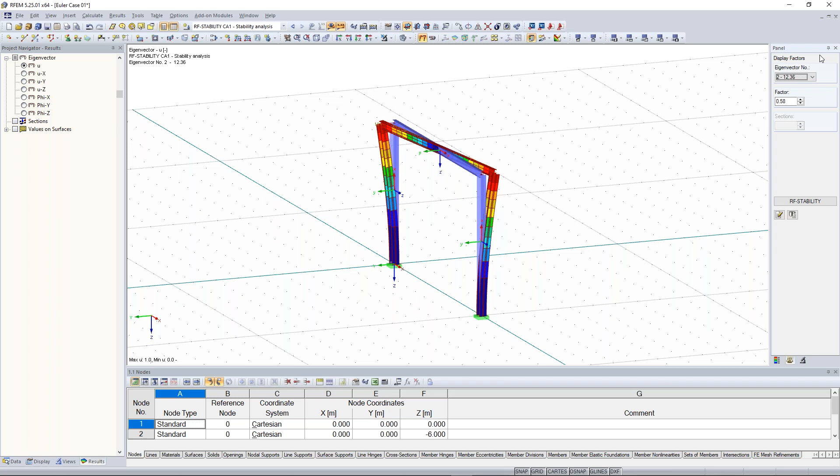Here the same. We have deformation out of the plane, so the eigenform shows out of the plane globally, the whole system. The third eigenvector is that eigenform that we know maybe also when we have eigenforms in plane. And maybe also watch the other one. This is also out of the plane. How can we prevent this failure out of the plane?

There are two possibilities. When I want to calculate it just 2D, and I can assure that buckling out of the plane isn't possible, then I just change here at the general data, right click, general data, the type of model to 2D XZ. Let's do it. Calculate RF-STABILITY again. And now let's watch the first eigenvalue, and this is this one. And when I switch to the other ones, only in the plane, and so on.

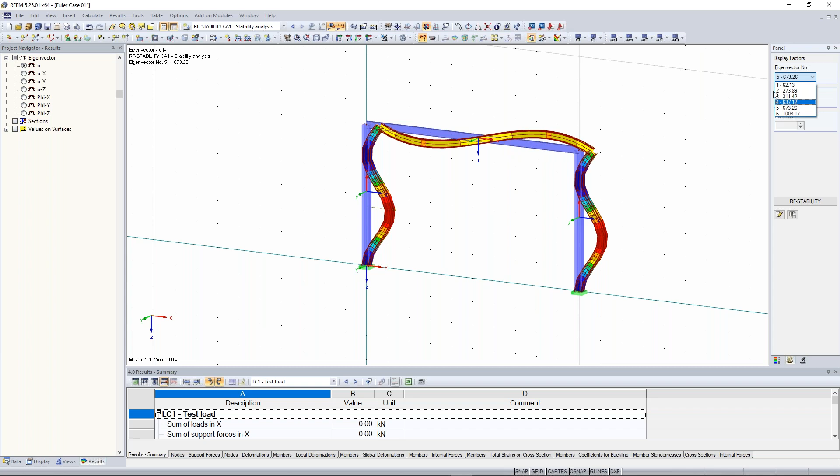But how can I prevent this when I have a 3D model? Because normally structures are in 3D. So, general data, 3D again. I can add here additional supports which carry loads from the global y direction.

So I select here the upper nodes, create here new nodal support, and now I want that this nodal support carries only forces in the global y direction. Therefore, create new type of nodal support. I activate the deformation in this direction, and in this case it's uy. I click on OK, and let's see what's going to happen if we have the same cases.

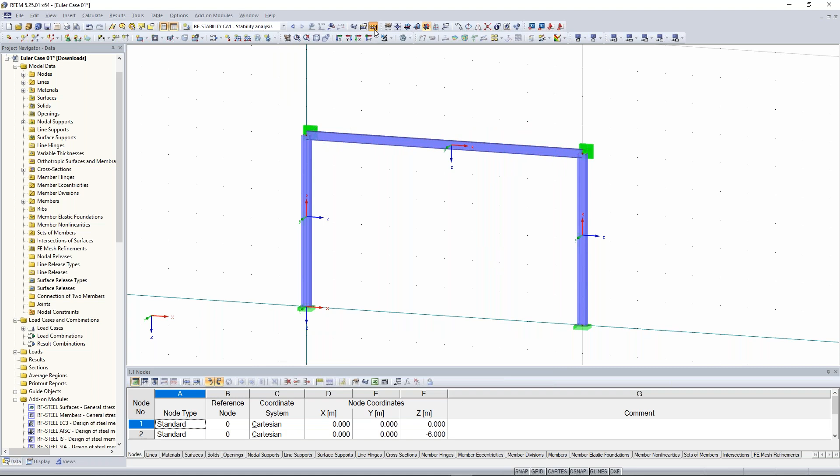Again, the first eigenvalue is here, this one. Next one is this one. This is out of the plane, but only the column, not the upper girder here. And this is important to know. So this is more a local failure. This is a global failure. Okay, this is important to know.

Good. I have forgotten one thing, honestly. I'm sorry about that. When you take a look at the effective lengths, you can use them also for stability analysis, for steel design, for example. And when you calculate this by hand and compare the results, it can be possible that your effective length calculated by hand and the result from this program differ. They can be different. This is because of the activation of the shear stiffnesses.

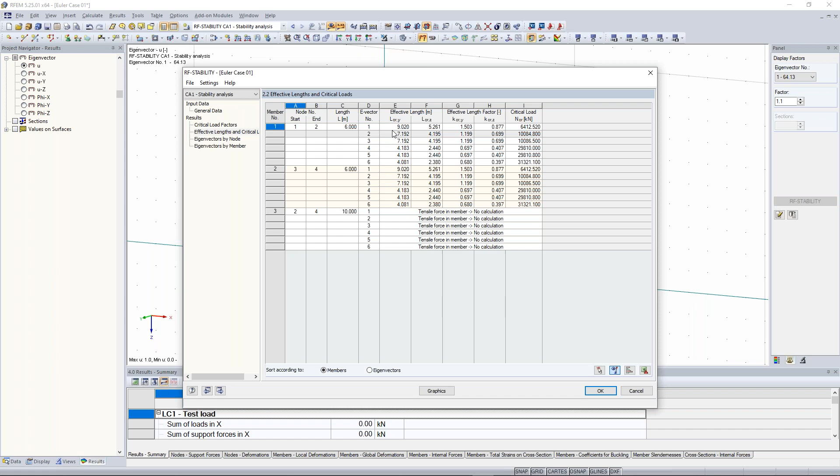So let's take a look at the results. Effective length. So remember this one, effective length, 9 meters, 9.020. When we change the calculation parameters, deactivate the shear stiffness and calculate this again, and take a look at the results, we see different effective lengths. This is due to the shear stiffness. So keep that in mind when you want to compare your hand calculation with the results of the program.

So what does this mean? Effective length, L critical, Y. So first of all, effective length factor 1.5. You have to multiply your member length with the effective length factor 1.5 in order to get the effective length. So when you calculate 6 meters times 1.5, then you will get 9 meters. And 9 meters is this. Oh, sorry. Nine meters is this member length here. So you have to imagine that this is the member length here, something like that. Good.

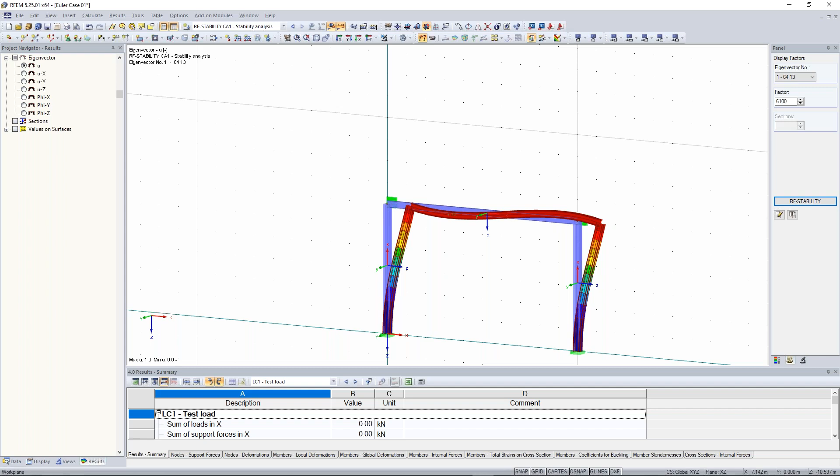I think this was everything. Bastian, are there any questions, or should I show something again? There's no specific question, but maybe you want to show us how you can create a joint in the beam, or a joint connection between the column and the beam.

In general, every member has a member type, and this is the member type beam. This means that every member is rigidly connected to the other one. So no hinges, stiff connections and stiff joints. When you want to add hinges, like a member hinge or also kind of springs, you can add a member hinge here. Let's do that. So we suppose for the upper girder a hinge at both ends. A hinge means we don't want to transfer any bending moments to the other part, just shear and normal forces. So therefore I have to activate phi y and phi z.

And the same also for the member end, because every member and every line has one starting node and one ending node, and also the member direction. In this case, the member direction, according to the local x coordinate system, goes from left to right. So on the left side I have the starting node, and on the right side I have the end node. Therefore, I will get this member hinge on both ends. So now you see this white node.

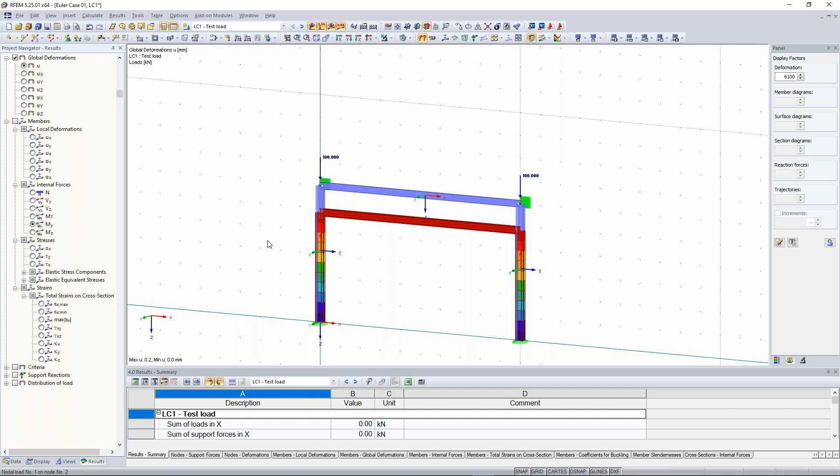And now see what happens when I calculate it, concerning deformation. Maybe it would be better when I have a distributed load there. Then you can see the results a little better. You see here the deformation. I think that's pretty clear. And also the bending moment. At both ends I have no bending moments.

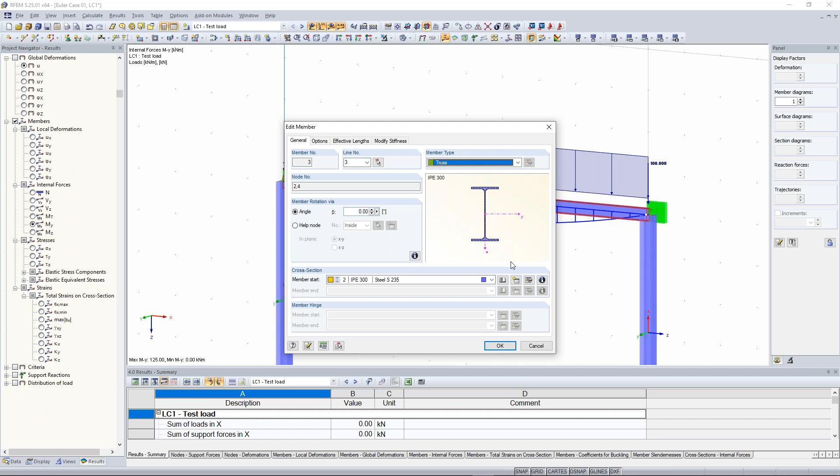And the same thing: when I have one beam which has member hinges on both ends, then instead of this beam with both member hinges I can also create another member type, this truss member type. We also offer other kinds of member types, but we come to those in the other parts of the training. So I choose truss. Truss means that I also have hinges on both ends. I click on OK. Remember the 125 kilonewton meters. I click on calculate. And you will get the same result.

Good. Bastian, any other question? No, you just solved the last question by using this truss member. So no more questions. Okay. Very nice. Now I have prepared the last question for you, Paul. Please answer me that.

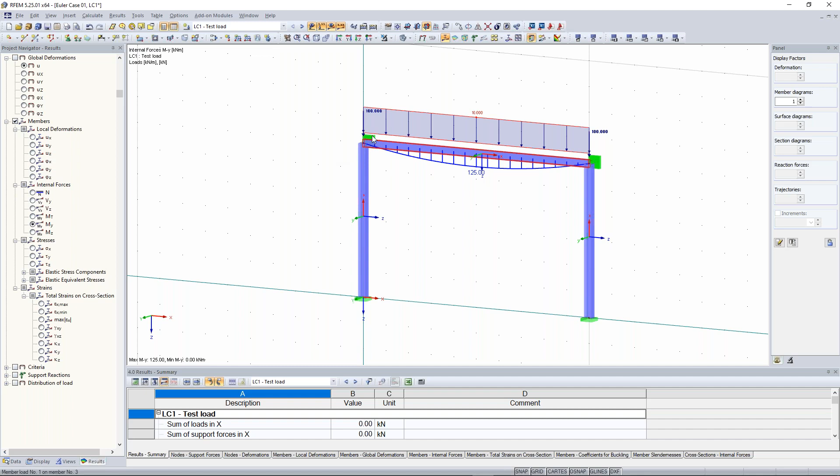I'm sorry for that. Let me show it to you here at RFEM. When I want to have a support node which has only horizontal forces, I have to activate Px and Ux, these two. Sorry for that bad formulation. But when I have something like this, horizontal forces in x and y direction are considered. Okay, good.

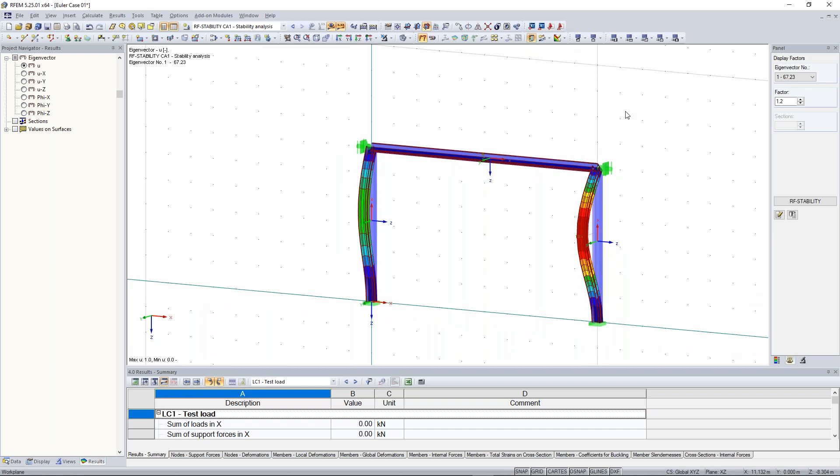Can you show us how to calculate truss stability? The calculation of the truss stability is almost the same, there's no big difference. Why do we need Vz for beam hinge in the previous example? So first of all, the calculation of truss stability is almost the same, no differences, and so on, you can calculate this as well.

Now let's jump to the continuous plate. There was one question, why we need Vz for beam hinge in previous example. I think you mean this one, this nodal support. Oh, come on, this one I can tell you why. Because when we calculate it like that, the beam would rotate over its own axis, so this would cause an instability.

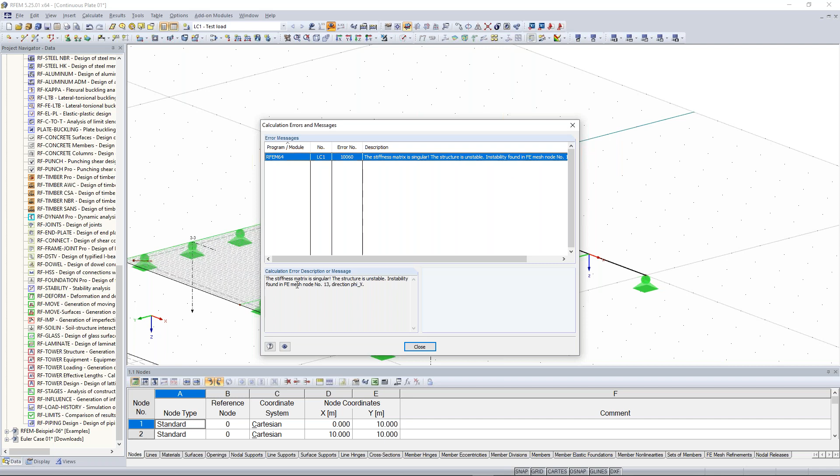I can show it to you, and therefore we have to close this directional deformation, otherwise it won't be possible to calculate it. Stiffness matrix is singular, instability found. Structure is unstable, instability found in FE node in the direction phi x. Therefore, we have to close this possibility of movement. And then it works.

So now the other question, can you model a two-way slab in 3D and compare it to hand calculation? We will do this in the other parts of the training. And yes, today's training or webinar was free for students. Exactly.

So, Bastian, anything to add? Or do you have something? You were too fast, because, yeah. Sorry, Bastian. No, but I would say that we have everything. Do you? What do you think?